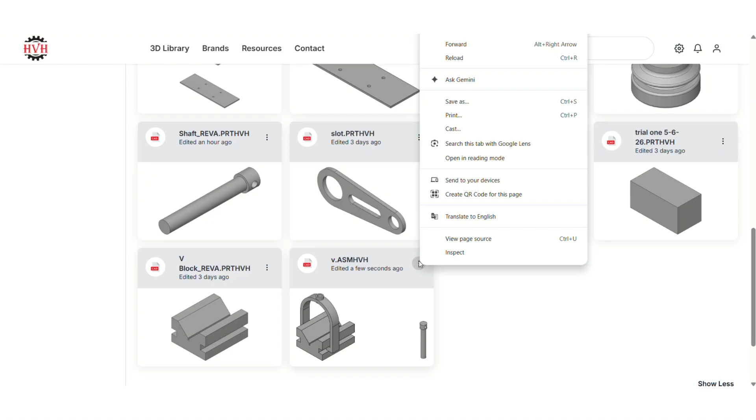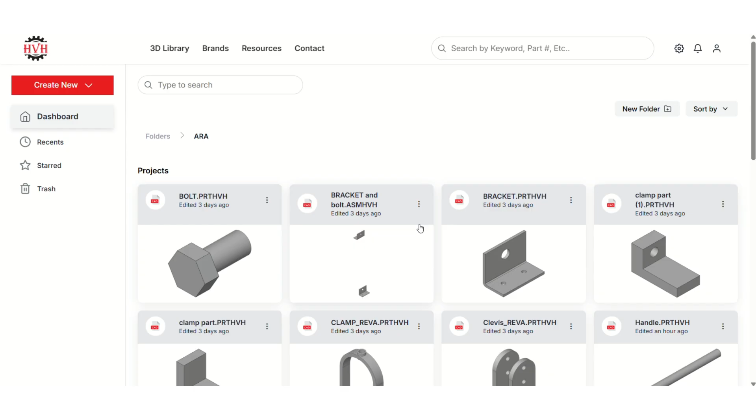We'll show you how to do a simple assembly using some existing parts. Our tutorial is going to be about a V-block. I had one, I'm gonna delete it just to make another one to show you how it works. We're gonna use this existing V-block, clamp, handle, and a threaded stud. To do this, we go to create new assembly. We're gonna name our assembly, our part number here. Let's say V block assembly. Save. It will take us to assembly environment. Here we are. We're gonna insert our first part, which is a V block.

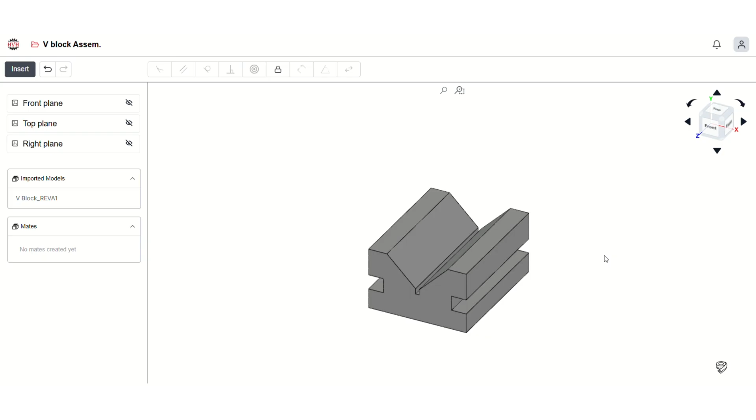Here it is. I'm gonna turn off my plane, I don't need it at this moment for this job. I'm gonna lock this V block in place. Click on it. On mate toolbars, we have lock. We press lock, click on it. It is here. It's got locked.

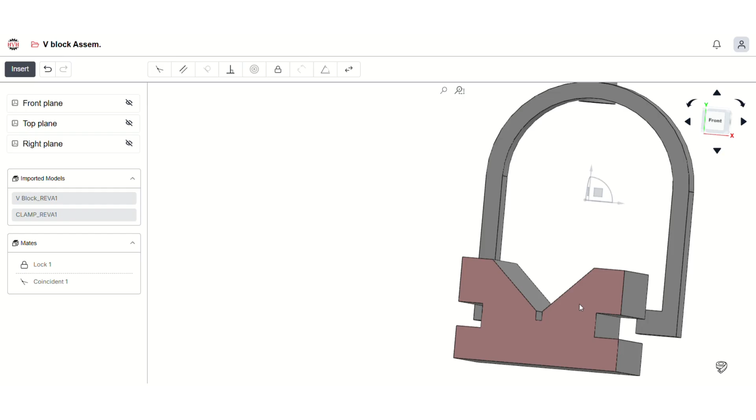Insert the other part, which is the clamp. Double click on it. The clamp is here. We're gonna do some simple mates. We're gonna choose this face, mate it to this face. Press and hold Control key, choose this face also, and go to toolbar, coincident. Click on it. We have that here. The other mate, we're gonna do another mate, this face. Press and hold Control key with this face. Again coincident, we have second mate. Okay.

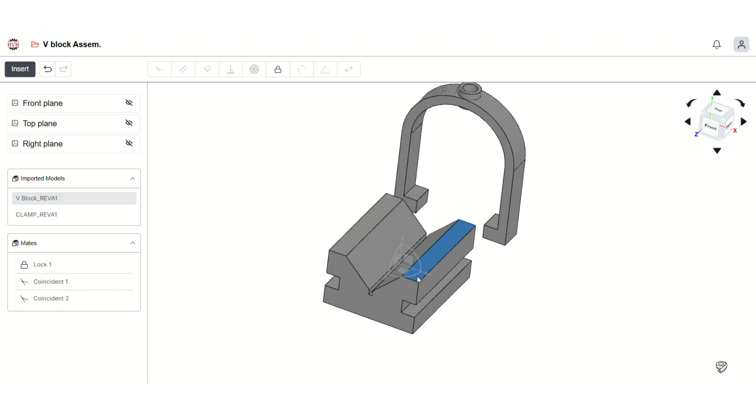Now what we're gonna do? So it's in right place. Okay, we're gonna leave it somewhere here. We're gonna bring our stud, threaded stud, insert. Here it is. Got dropped there.

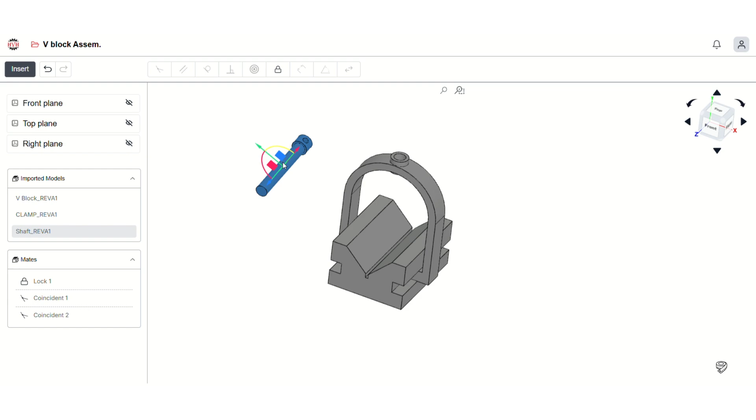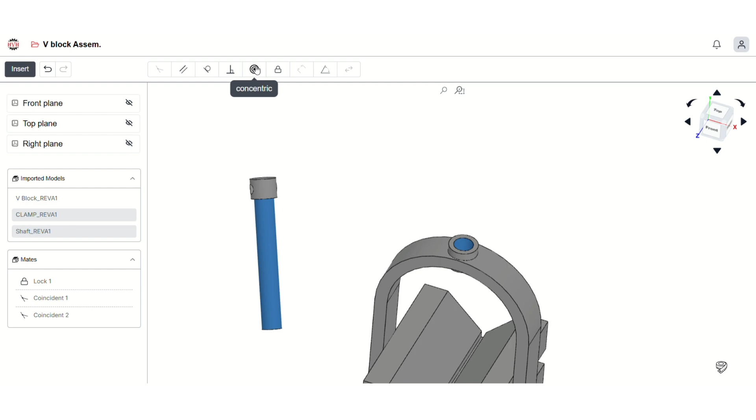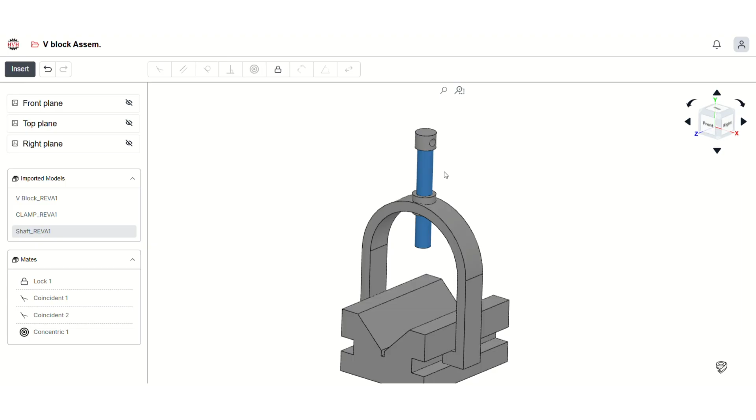In case you need to rotate this, just click on the part here on the imported models section, and you see you can rotate it any direction you wish. This way, this way. Okay, and this is gonna go, the shaft gonna go inside the hole. Again, choose the surface, press and hold Control key, choose inside the hole. Again, surface, and concentric. There we are. Okay. We have this option.

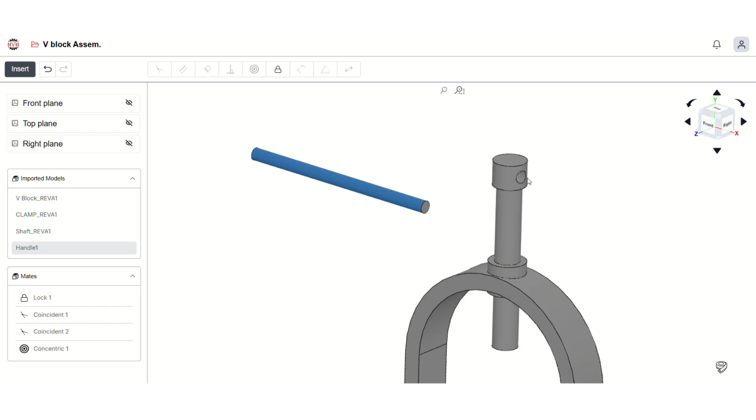I'm gonna insert the handle, last component. Double click. Handle is here. I'm gonna rotate it to this direction. Okay. Choose the surface, press and hold Control key, choose the hole, concentric. Okay.

Here it is, our simple assembly. We're gonna add more details for our upcoming tutorials. Our beta version is gonna be released soon, and we will also have drawing on upcoming tutorial videos. We will show you how to create drawing from solid models.